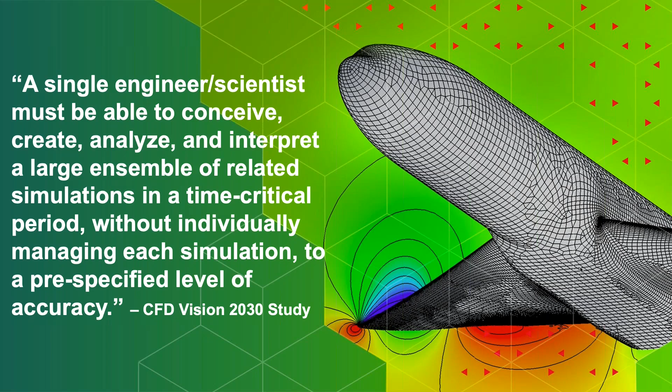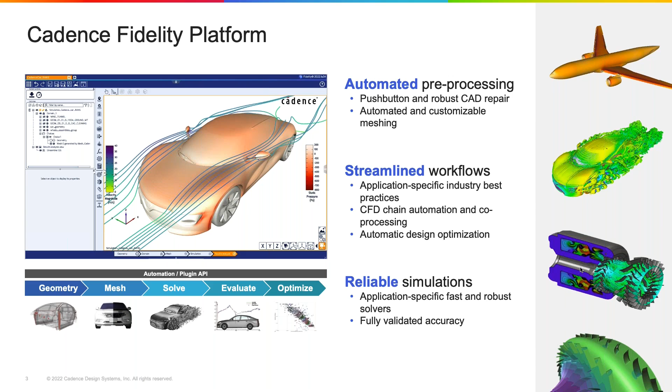And one of the ways that we're addressing this at Cadence is through our Fidelity platform, kind of an end-to-end solution framework for geometry pre-processing, meshing, running calculations, optimization, post-processing. And the technology portfolio is pretty vast, including things for design and geometry and mesh generation and different solvers and optimizers. But today, as the title suggests, we're going to focus on Fidelity Pointwise,

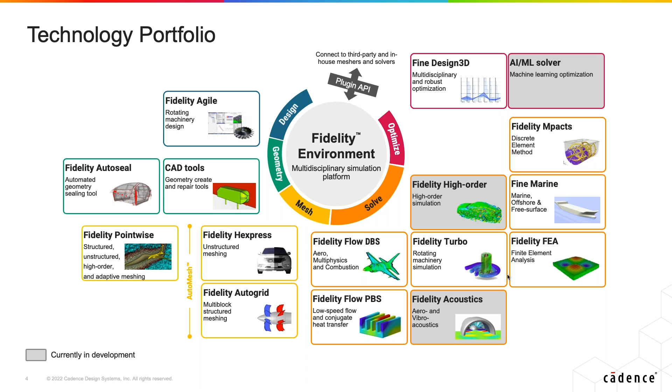which is our independent CFD pre-processing tool that really represents 40 years of mesh generation research and development, and has one of the most comprehensive suites of meshing features out there, from geometry import, bringing in geometries from a variety of sources, exporting to pretty much every CFD solver, including SU2, the ability to generate all different kinds of meshes, multi-block structured, hybrid, overset, curved high order meshes, perform grid adaptation, and even automate the entire meshing process using our Glyph scripting language.

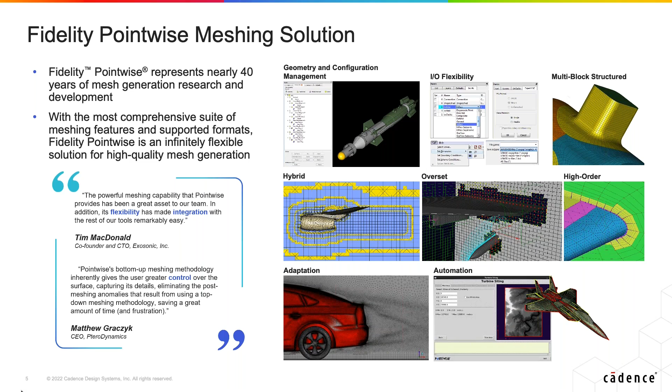And if you talk to some of our clients, and some of you in the room are using our software as well, the three things we hear most frequently are: we're using it for its flexibility, being able to work with a variety of different tools, a lot of I/O flexibility; the ability to integrate with a process, so you've already started to piece together a CFD process and you want Pointwise to integrate very seamlessly with that; and then the control it gives you over the meshing process.

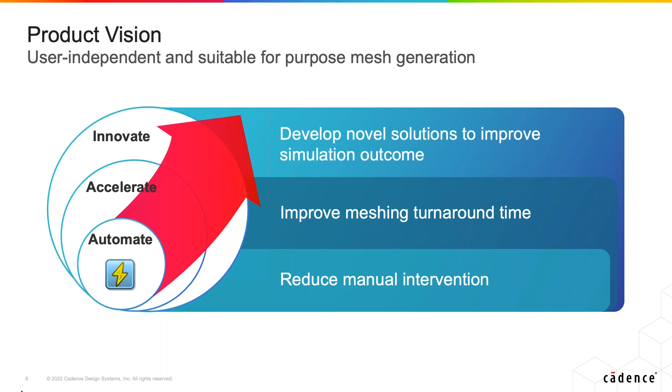If we look at Pointwise specifically and the vision for that product, it really stands upon three pillars. The first being automation: we're working very hard to reduce the amount of manual intervention for mesh generation. Acceleration, improving your meshing turnaround time, and then innovation, developing novel solutions to improve your simulation's outcome. And this really builds to the vision of user independent and suitable for purpose meshing, meaning it doesn't matter who sits down in front of the tool. At the end of the day, everybody would be able to generate a mesh that is suitable for its intended purpose. And so that really speaks to Flashpoint.

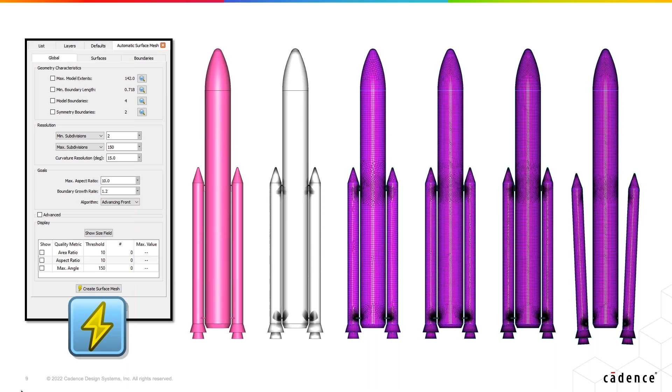I introduced this last year in the surface meshing component, but Flashpoint is our suite of goal-oriented meshing tools built in Pointwise. Again, we started with surface meshing. You bring in a geometry, you prepare that geometry, you set up some meshing goals, and you can automatically generate a watertight and high-quality surface mesh that adheres to those goals. It really gives you the ability to build recipes and encapsulate best practices to work on parametric designs, configurations, do grid refinement studies like this. And at the end of the day, it really accelerates the meshing process.

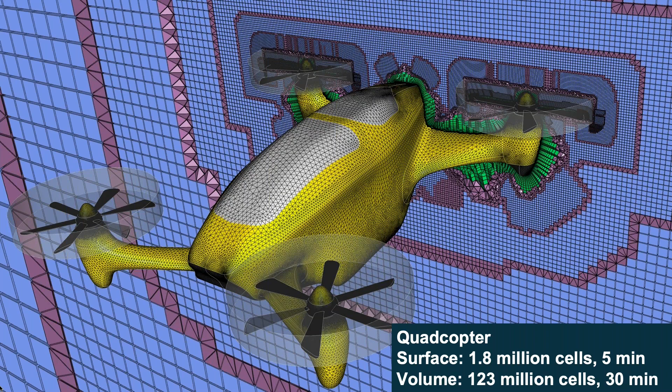So something like this drone, where it may have taken hours or days or weeks before to generate a mesh like this, now in a push of a button we can generate a surface mesh automatically with anisotropy, and a 120 million cell volume mesh in 30 minutes on a laptop using our T-Rex algorithm for the viscous region, and then the voxel technique for the off-body region. So that serves as a recap and an intro into Flashpoint.

I'm going to turn things over to Erick, and he's going to talk about some of the enhancements that we've made since we spoke to you last year to automatic surface mesh, but also some new capabilities in Flashpoint. So Erick? All right, thank you, Travis. Let's go ahead and jump right on into our next slide here.

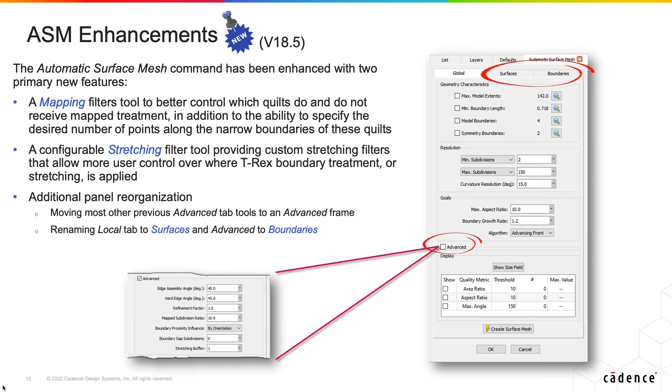So as Travis mentioned, this is our goal-oriented meshing tool, automatic surface mesh. We've made some recent changes, and this slide overviews those changes. Essentially, some organizational work that we've done, some renaming of tabs, as you can see at the top right of the image on this slide. But the powerful tools that we've added recently are a mapping filter and a stretching filter, and that's what I want to focus on here for this part of our talk.

This next slide gives a breakout of the Surfaces tab of Automatic Surface Mesh, and specifically a new mapping filter tool, which gives the user now the ability to have influence over a process in Automatic Surface Mesh that previously was all automatic. And so now you can specify which long, thin, narrow types of surfaces you prefer to have a special treatment that we call mapping.

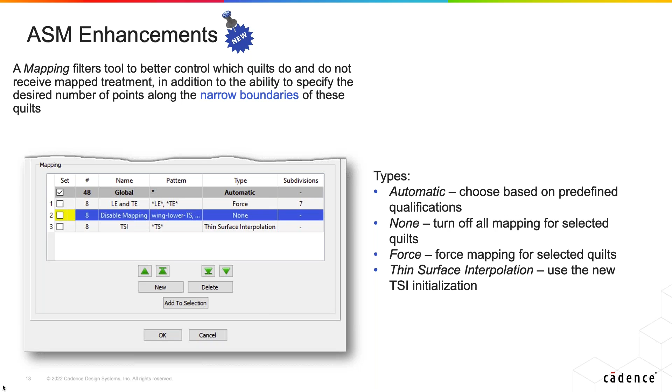And in particular, in the middle of this table, you'll see there's a column labeled pattern, which gives you the ability to specify a string in there that's matched against the naming of the surfaces in your geometry, and gives you an automated control, especially with our glyph scripting language.

So jumping on to the next piece that we've added for Automatic Surface Mesh is the stretching capability. This is the third tab of ASM, the Boundaries tab. In the previous release of Automatic Surface Mesh, you really only had 3 classifications: curvature, convex, and concave, for the boundaries of your surfaces. That was set up for you automatically, and they were either on or off. It was an all or nothing setup.

And we realized pretty quickly users needed to be able to control that a little bit more and have some customization. So in the latest release, we've added the ability to add custom stretching filters. And again, for this feature, this table at the bottom allows you to enter patterns to match the naming of your surfaces in your geometry and give you a more automated control. And again, with our glyph scripting language, you can automate this process very nicely.

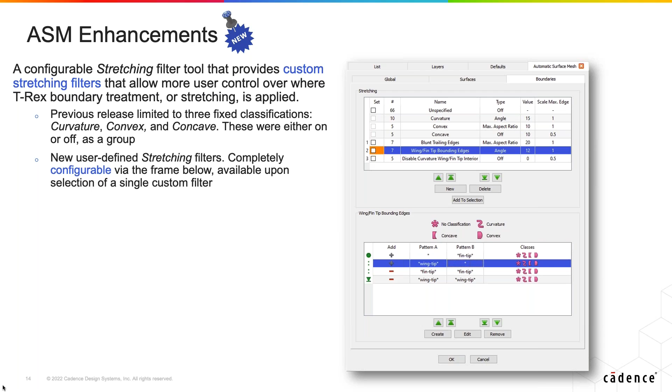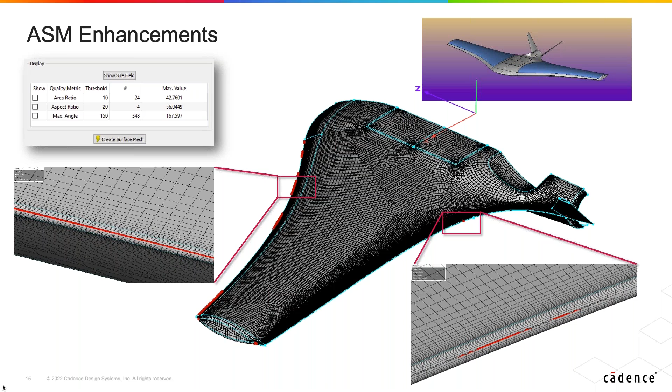And so what happened in our original release of Automatic Surface Mesh is, in the bottom right image, you can see it would apply stretching on the trailing edge at the top and the bottom. And as those T-Rex anisotropic layers came together, it was trying to fill in with triangles, and you could get some skewing or large angles in those cells. And the table at the top left does indicate that for max angle over 150 degrees, we've got almost 350 cells. And so this was the sort of thing that we wanted to address with our newer capabilities in Automatic Surface Mesh.

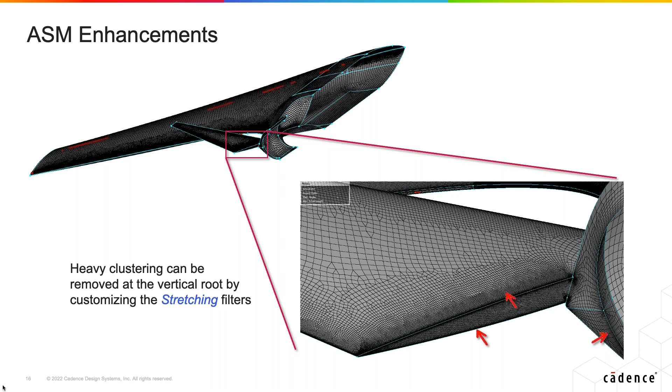This next slide actually shows another area. This goes to the stretching filter that I mentioned on the third tab of Automatic Surface Mesh, where convex, concave, and curvature edges are classified automatically, and it would apply stretching to those boundaries with our T-Rex anisotropic meshing. And it was either an all or nothing setup. You could either have all of those boundaries treated that way, or you had to turn them all off. And we quickly realized you need to be able to customize that. And this was just an example of an area of this geometry where you may not want that stretching applied.

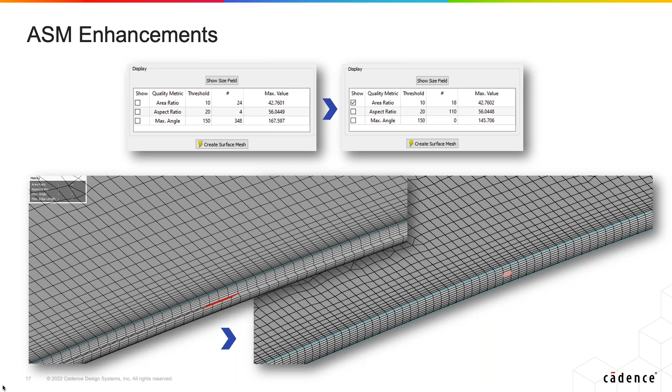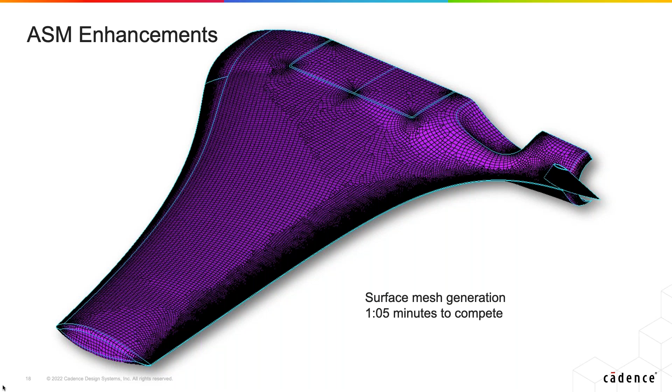And so just to wrap up the Automatic Surface Mesh discussion here, this is all the surface grids for this particular geometry. We get a really nice matching and blending across the surface grids at their junctions, a nice clustering where we need it. Setup for this was just a minute or two. It took about a minute on my laptop to generate the surface grids, and we're off and running and ready to create a volume grid for this case.

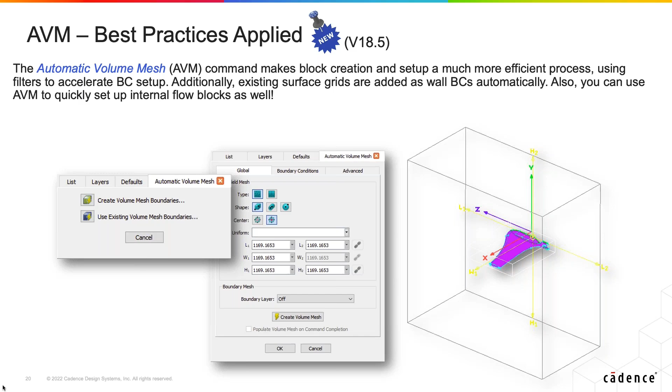And in the middle of this slide, you can see just an example image of the panel. We'll talk about it a little bit more. I think the most powerful capability for automatic volume mesh is this ability to have more control over boundary conditions to set up your volume grid for the 3D version of T-Rex anisotropic meshing.

And for those of you that may have used this tool, even though this table at the top looks pretty much like the one in our solve command where you set up T-Rex outside of AVM or automatic volume mesh, it has a special additional capability in that for the selected new boundary condition, you get a new table at the bottom of this panel that again lets you do pattern matching.

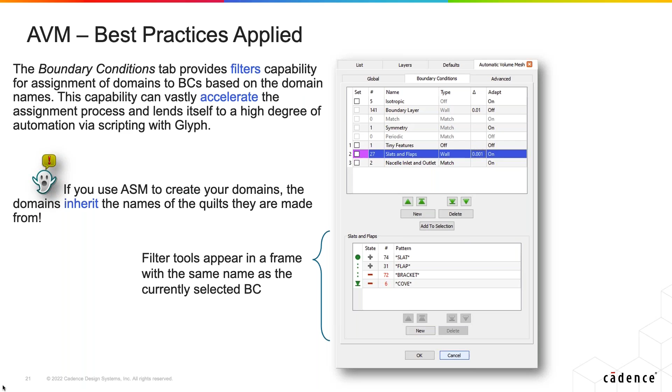And so if you've used automatic surface mesh to create your surface grids or your domains in Pointwise, the naming of your quilts is applied to those domains or surface grids, and that follows through into automatic volume mesh. And again, you can use pattern matching to select those surface grids and set up your boundary conditions in a very automated fashion, which I think makes this tool very powerful for automating your meshing.

So kind of an overview here is the main panel on the left-hand side, just showing you some of the tools for automatic volume mesh. At the top, you can choose whether you're going to use a Delaunay-based tetrahedral field grid or our voxel method for the field. Just below that, you can choose the shape of your far boundary. I've chosen rectangular, as you can see in the image. However, on the far right, there's example images of the panel and what it looks like if you choose either cylindrical or spherical as well.

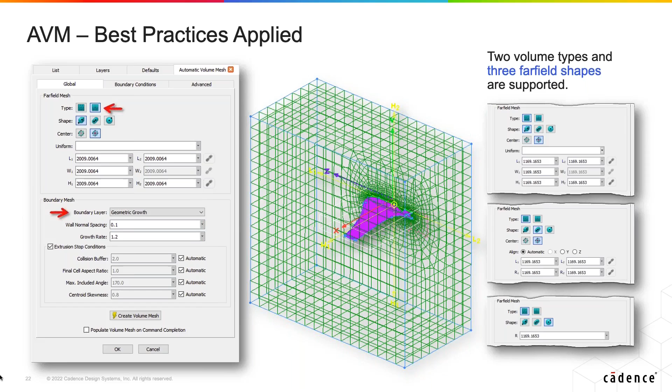And in the middle of the panel, denoted with the little arrow, is a selection there where you're actually telling it that you want to use the T-Rex method for your boundary layer or near wall meshing to get a nice viscous cluster.

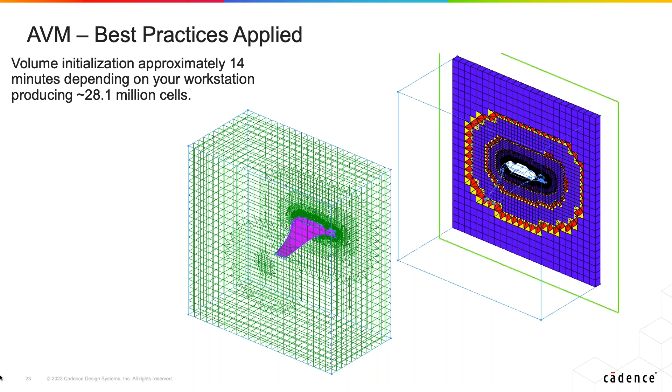And I think the key factor here is just how quickly you can set up these processes with ASM and AVM, and probably in about 16 minutes or so total, you've got a really nice volume grid to work with and send into your solver.

A couple of additional cuts through the interior of the voxel topology. Here I'm just showing cells by color. The blue is your hexes, the red are tetrahedra, the yellow are your pyramids, and then green, you see some green near the body, those are prism cells.

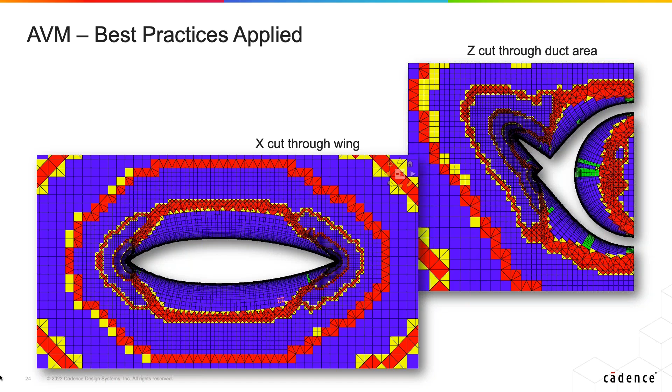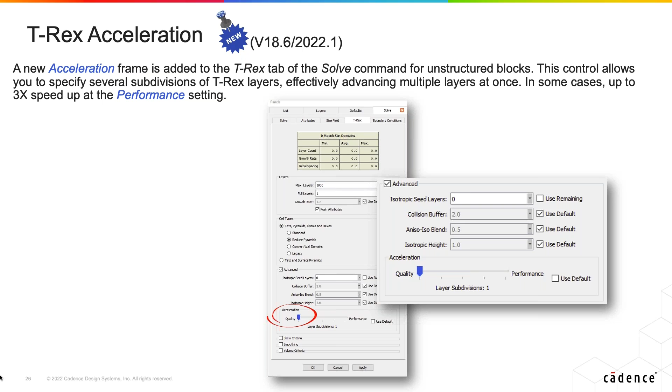As you move that slider across to the right, it's going to advance multiple layers at once. And so it cuts out some of that checking, some of the smoothing that's going on. And in that way, it accelerates the process. But as the slider labels indicate, you may lose a little bit of quality as you accelerate it. But we have seen for a number of cases in our testing up to 3 times performance speed up.

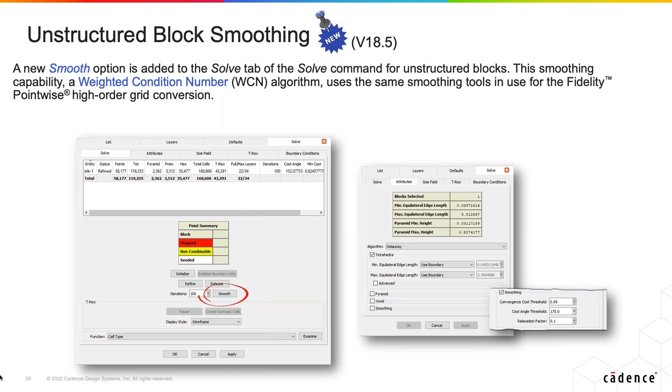So my last slides here are going to talk about unstructured block smoothing. And here we have a new command in the solve panel called smooth. It allows you to take advantage of our WCN algorithm that was put into Pointwise specifically for our high order export. And what I want to do is just jump over and talk about the primary control for this, and that's the cost angle threshold.

This actually goes in and looks at all the cells in the unstructured volume and classifies them and chooses the ones that exceed that measure, and those are the only ones that actually get smoothed, and it makes the algorithm much more efficient.

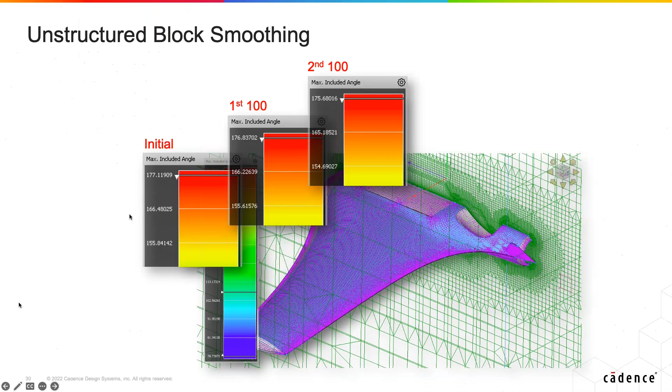Yeah, Eric, can you go back to the, I forget what you call it, the cost angle something, the metric that you guys used to do that last optimization for the unstructured blocks? What was the angle that you're using? So I was trying to go back here to the slide, but it looks like I'm not able to. But for this particular example, I actually set it down to 173.

I found that because it's evaluating the cells and determining which ones are going to be smoothed, you want to keep the threshold fairly close to your existing values so that you're not overshooting and adding a large number of cells into the smoothing algorithm. I believe the default is 175, but for my example case, I actually had it set to 173.

Yeah, just to clarify, so is that just maximum included angle? I see that on the next slide. Is that the definition of that? So it's not exactly the same as the calculation that we have in the examine command for max included angle, but it is very close. And we're actually looking at adding a new diagnostic in our examine tool that is exactly the same as this cost angle threshold so that users can get a one-to-one comparison. Got it. Great. Thank you.